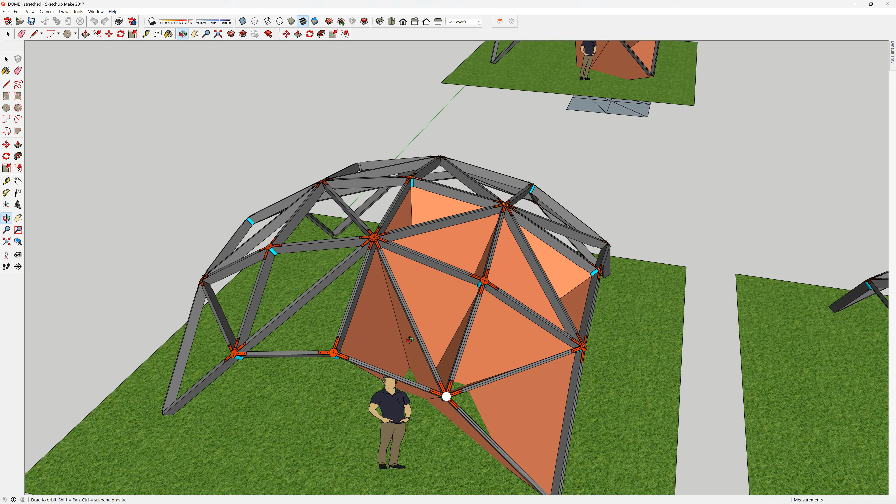This is not part of the Total Redraw series of videos, but it is a derivative or based upon its models that I've actually created. I've got this one, which is the base upon which we will look at the other two. There's actually a third one, which logically I should have included in the total redraw, but I didn't. But I'll include it in this particular video.

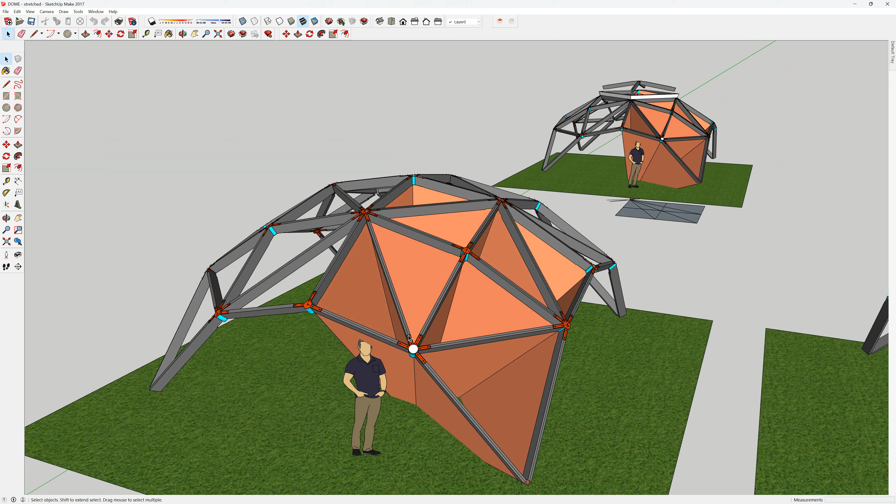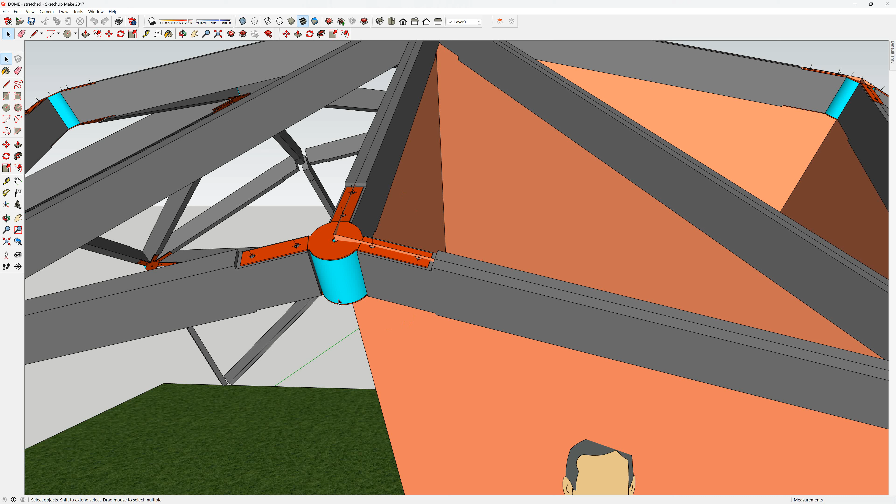So this is where we kind of left off, with some of the struts being altered. Take the hubs, top and bottom hub with a tube, a reinforcement piece in there, but quite a strong combination. They can be independent of each other, the three parts. So they could be like that. They could be welded, bolted together, whichever way you go.

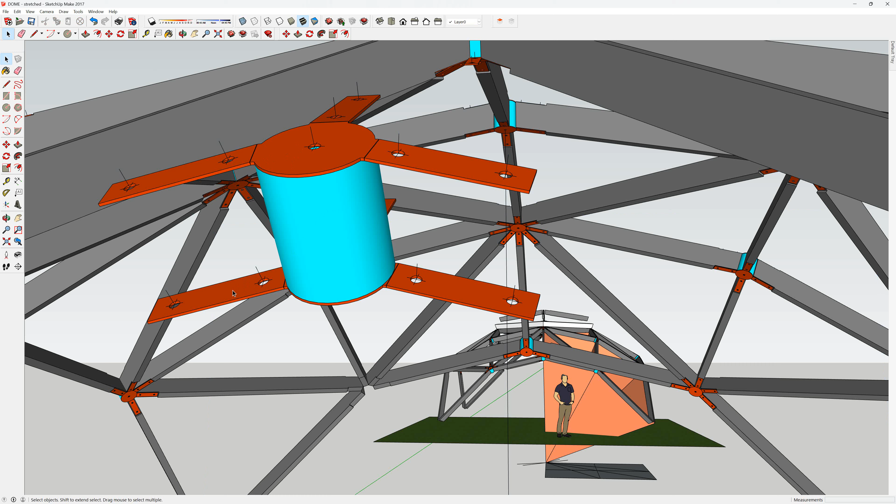If you want to make a heavier version, you can just increase the thickness of the plates, or as I suggested in one video, you could double plate this point here and have a single plate up here. You could have nothing up here, no tube, and just a double plate down the bottom, or you could have a single plate that's made out of thicker steel. So, in short order, you could alter the capability of this hub very easily and make for a very capable structure upon which to make your domes.

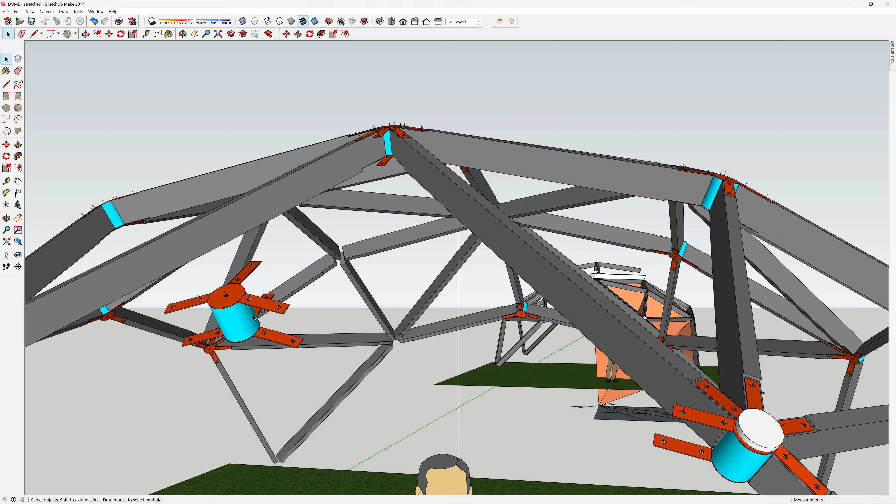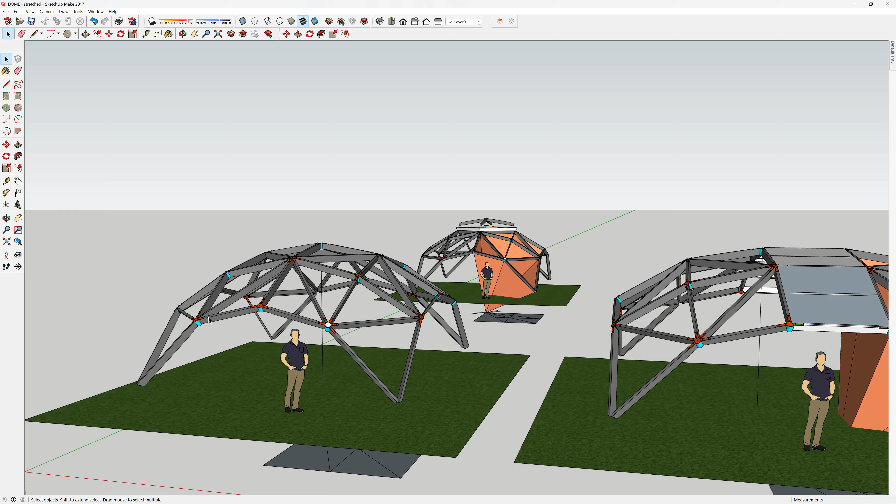Ditto for when I would use the steel tube and the threaded rods. It's very, very viable and very flexible, so that you could alter the dimensions of your items being used to cater for bigger structures. The structure is not small, but it is, after all, only 6 by 6 meters. Now, for a dome of this size, not size, but capability, I think you could go a little bit bigger and not have to change anything, because we've got it already inbuilt. So 7 by 7, 8 by 8, whatever, keep on going. I think this would be quite capable of fulfilling the requirements.

Make these timbers heavier? Yes. Probably have to start thinking about how they hold up on their own. If they're skinned, i.e. have got plywood or anything on the surfaces, then with the ply, it certainly would stabilise the timbers from not sagging, but from moving under their own weight, because of the span. So it may be that you want to go thicker than, as I've got here, 50 millimeters, maybe a little bit deeper, depending. But even this dome is probably a little bit overbuilt.

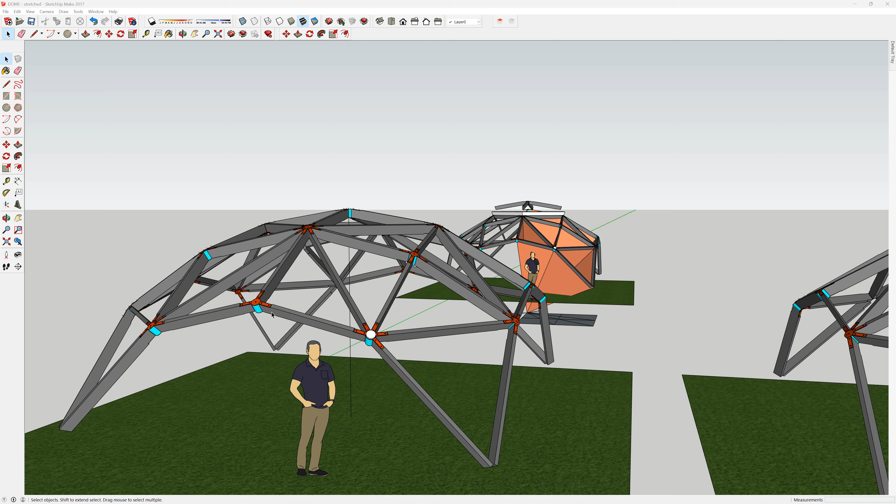You could get away with the 90 by 50 by 100. It's more than doable. So yeah, that is the base. We then can stretch it. As we see a lot of the dome pictures, you can alter it just by separating along the logical divisions that is part of the quad-based or grid-based system of drawing this dome.

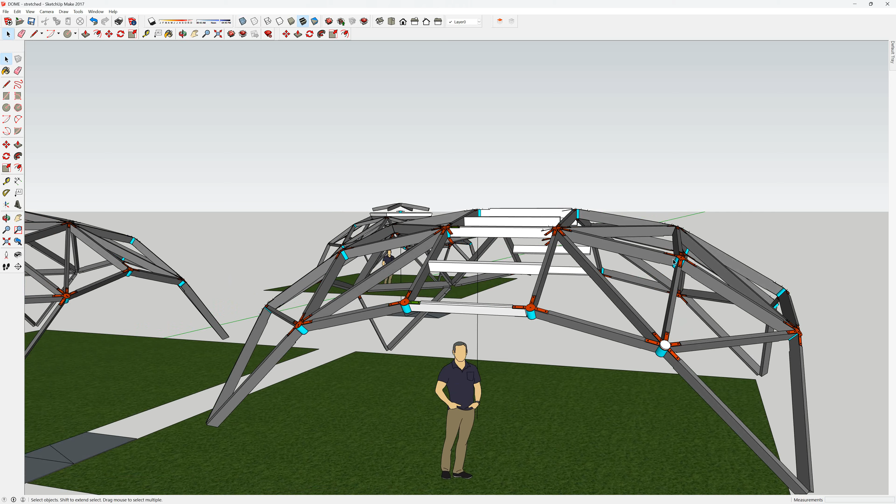Normally, you could divide it through this line as well, but because I've altered it to rationalise the struts for this point here, you can now no longer stretch it at that point smoothly. Still can do it, it just becomes a little bit more involved. But yeah, certainly doable, but just not as good.

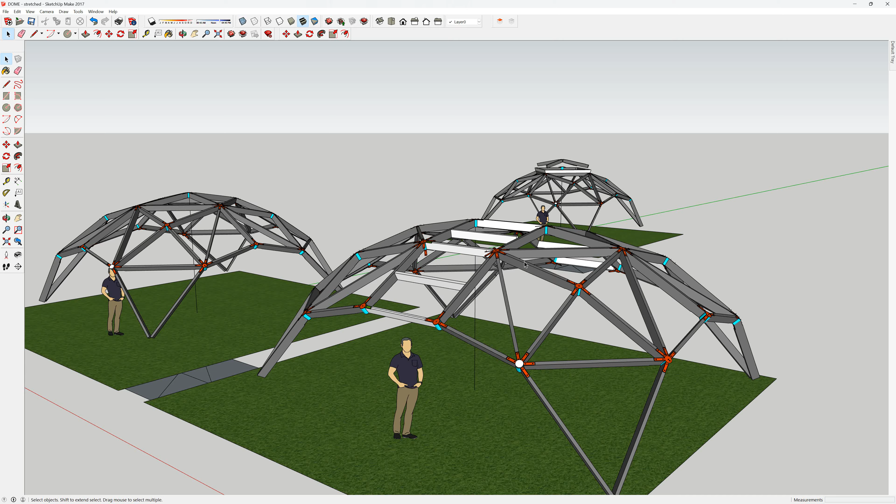And that was one of the things that I did look at, whether I would permit my design to have this alteration, and for the longest time I resisted that. But I thought, the reality is that if people are going to butt these structures up to another structure, that would be even more rare than the times that people would want to build this dome anyway. So it's up to the individual whether they want to do this.

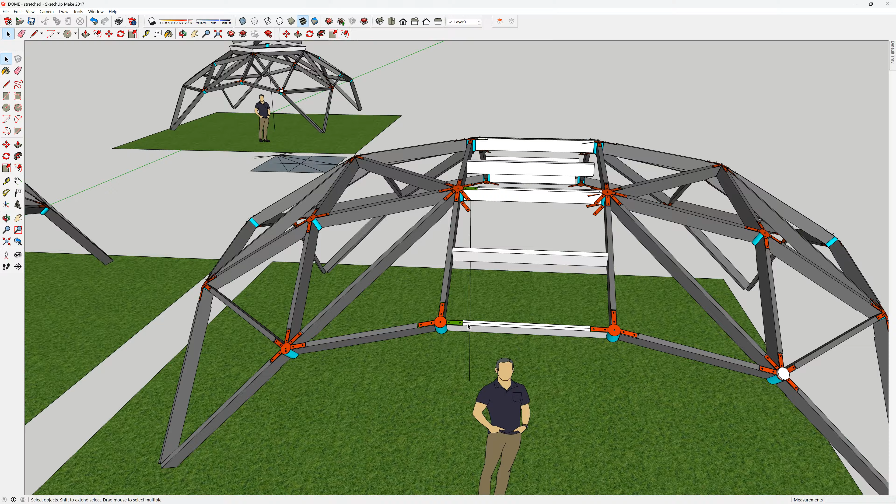I like the idea of having the struts identical, evenly spaced between these struts here, and sideways, of course, but others may not. Nonetheless, I'm not worried about that. So I'm just concentrating here, and I've looked at which hub needs changing. Of course, it's obvious, but it also impacts on how the struts and hubs act together.

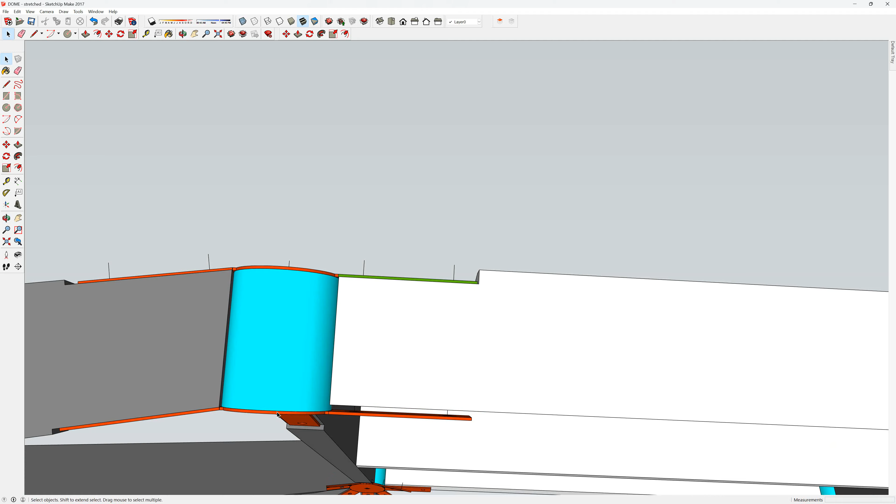This is still in plane for the surfaces, which does make a little bit of an issue here. We'd have to lift the hubs up a little bit if we wanted it to butt up against the strut here, as we would normally think necessary.

But if you haven't been following these videos and you're coming to this one fresh, well, you would have to probably go back and look at the other videos. But you can either lift and lower the struts up to match the hub, and that would be more permissible or quite logical to do if you were putting a membrane over this dome.

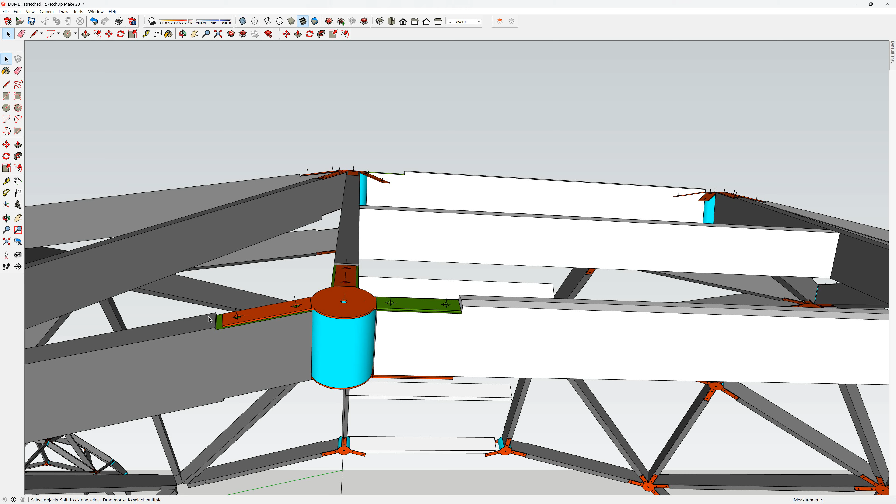If, however, you are considering putting a rigid cladding on it, it may be that you want to keep the surfaces in their geometrically correct position, so that allows you to create the dihedral angles onto which you can then fix your rigid cladding.

Plywood or the exterior grade chipboards - that's the consideration there for that hub.

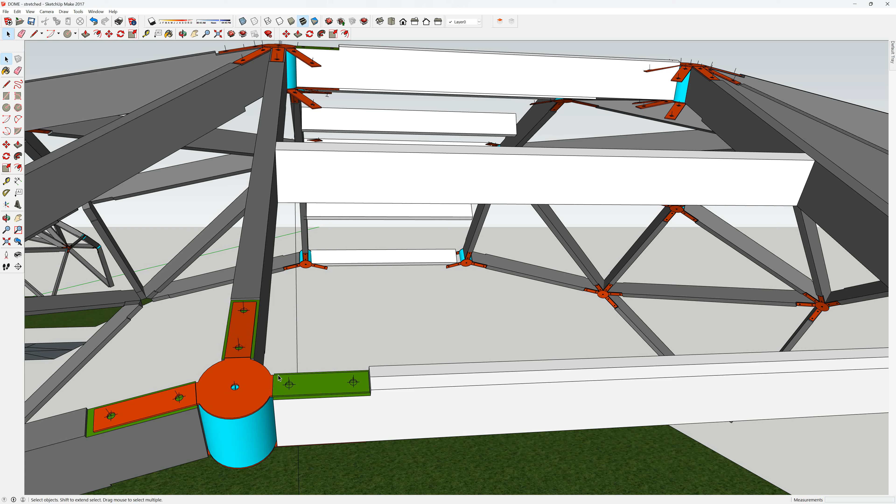All it was, is that you don't bend that tab down like you would in all the other ones, of course. That comes straight out from the plate. It is rotated around a little bit because, after all, it's not the same strut just lifted up as would be in the dome. Again, this one here is identical except for this tab here - it is just rotated round and not bent down. And of course it would have its corresponding one below it, and of course the top one.

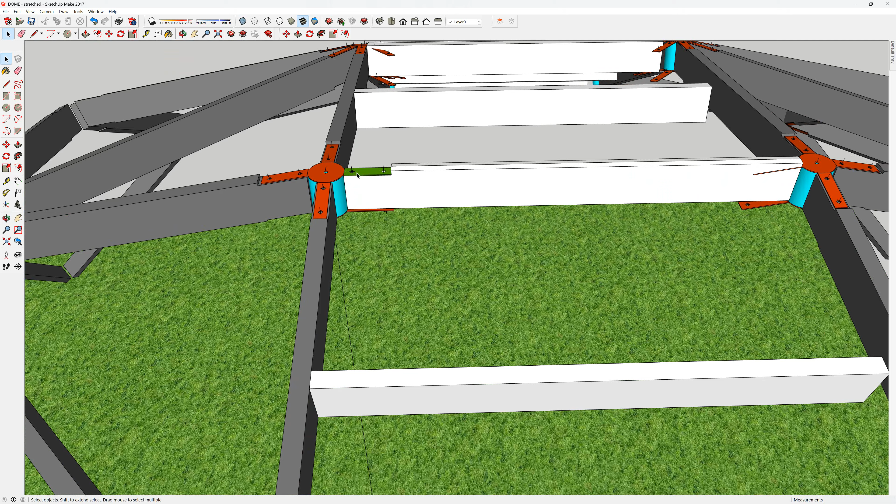I've shown, in this case, I've only done the 3 hubs necessary, and I've shown here that this tab has been altered from the original design. So not hard to do at all - it's no harder to do than the whole dome, like the dome that we had before, just as a dome.

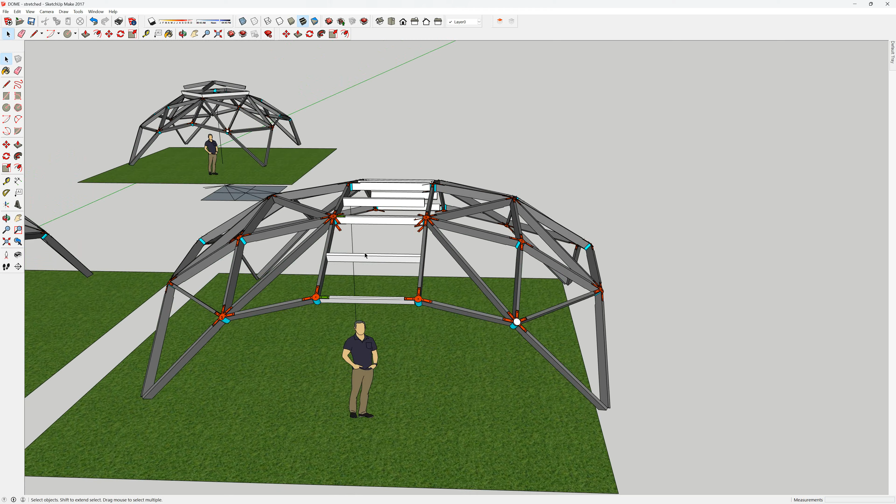But in short order, and this is only about 1,500 or 1.5 metres long, it certainly makes a difference to the function of the dome as to the area it covers. So instead of 6 by 6, it's now 6 by 7.5. Yeah, that's a significant difference, and it certainly looks different.

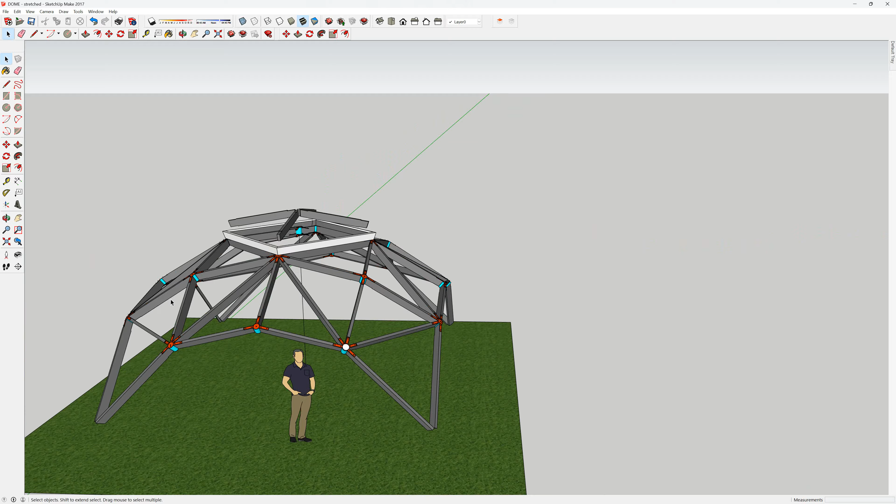The other one in the background is the same base dome as we start off with, but we lift it up. I haven't really done much development on this, but we can lift the top part, and I suggest we'd keep that now no longer transparent, with glass or anything. You could - there's no reason why you can't - but perhaps this becomes more of an opaque structure, and depending on how high we lift things up, we could well put a translucent perimeter underneath, the bit that gets lifted up. Haven't developed this, it was just an idea. I've seen it in another dome, and I thought I'll see what's involved for us to do it here.

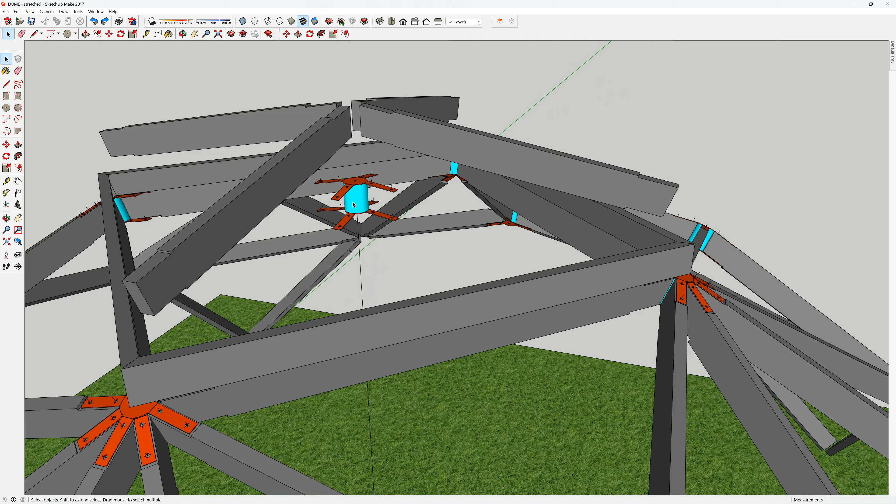Not much happens here. We can delete a tab at this point - no difficulty doing that. And then we can lift the centerpieces up, yes up, and of course that would go with it. That would stay identical, and we just extend what we're going to call rafters, I suppose, but these struts we just extend out so that it gives a wee bit of an overhang.

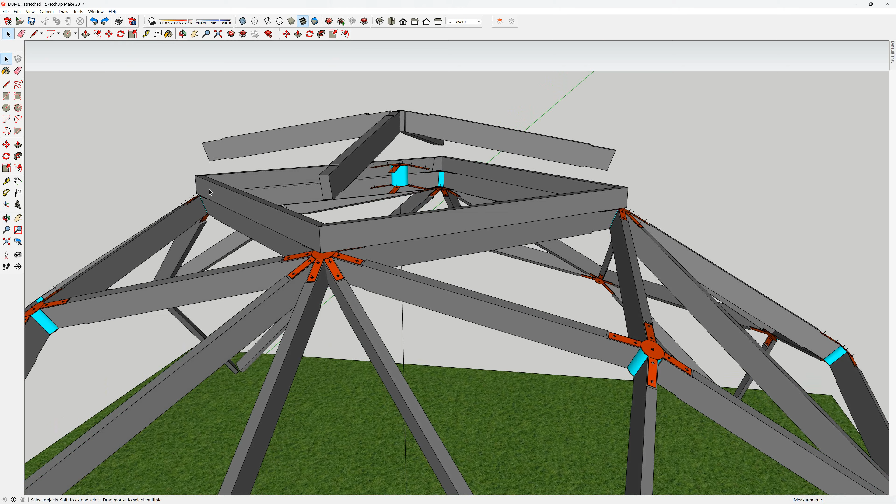Of course, we'd waterproof along the surfaces up the now vertical timbers, up and over, and then we can put our glazing around the perimeter if we deem that necessary. So that's pretty straightforward.

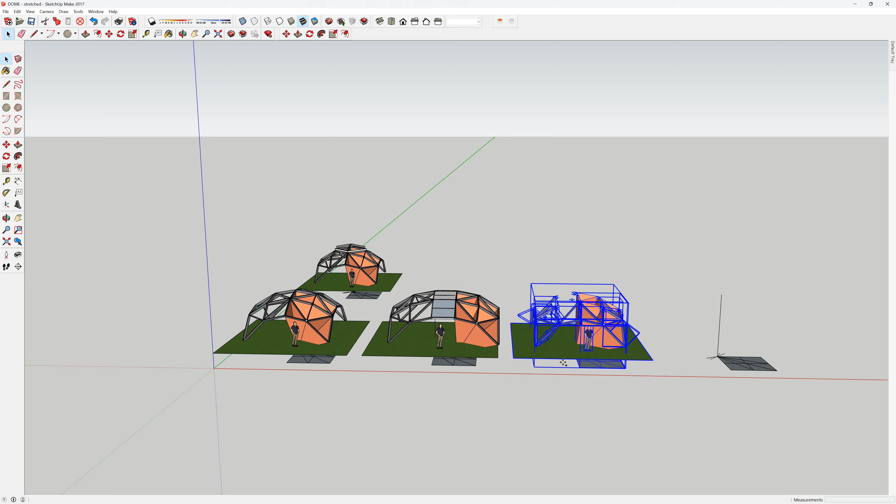Right, what's that doing? Let's see. Now what we can do is I'm going to move this one across 20 metres. I obviously didn't capture everything, so let's not do that. Move across 20 metres.

One of the things I've shown here is the dome to function nicely in the entrance area, is that I've always set a criteria for this: the point here that I'm circling now needs to be about 1.8 metres off the ground. 1.8 metres, I'm not going to say that is the average height for an adult male, but it's probably the average height of an average male, so you could walk up to and near this area here without smacking your head or fear of smacking your head.

Now, I know a few people that are a bit taller than that, so therefore they would want to walk through here, or we just have to lift everything up. What I've shown is that the dome - nothing changes, the whole dome gets lifted up, and it rests on some pedestals or piers bolted down to that. We keep this dead standard, and, well, it becomes a very normal structure. We don't have to alter anything.

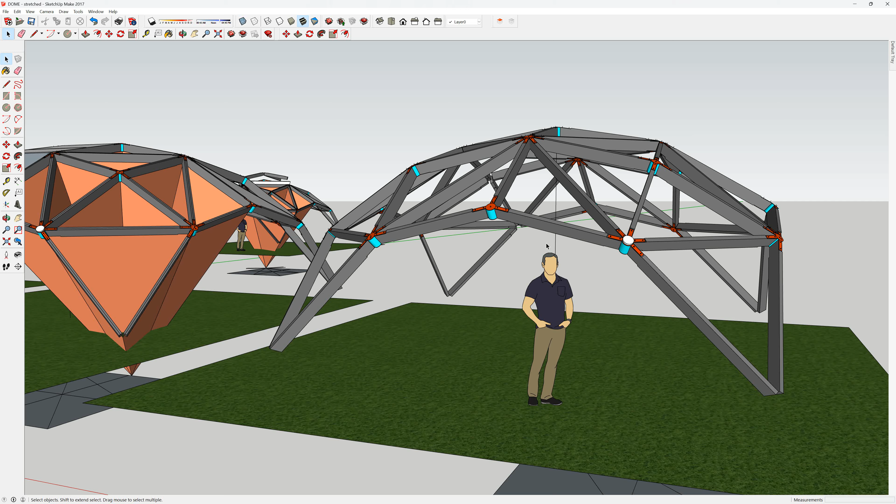However, one thing that may be beneficial - and I'm not going to probably do too much, it's just an indicator, I'll probably make a model up at some stage - is keep it, how would you say, I'm going to hide those... keep it looking like a dome by simply making the struts come down to this point here, rather than being lifted up, keep the struts at ground level.

There's a couple of advantages in that. Pretty straightforward, it's probably simpler rather than having a pedestal or pier sticking up out of the ground. Maybe easier. There is a little bit of alteration required on the hub, and that's why I'm not really worried about doing the modelling just now, because it's a little bit involved to change that. Not hard, it's just don't want to do it right now.

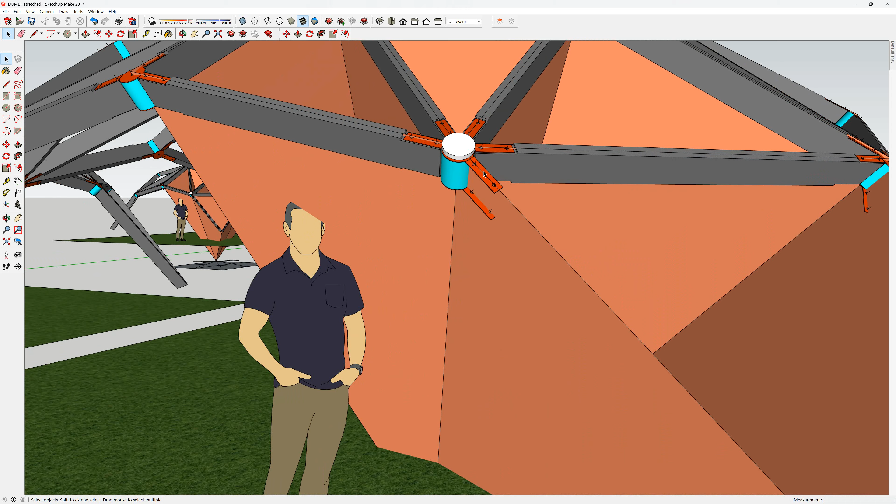But that would mean that these two tabs, or it's just one, but the tab on the plate would have to rotate slightly and be bent down a little bit more.

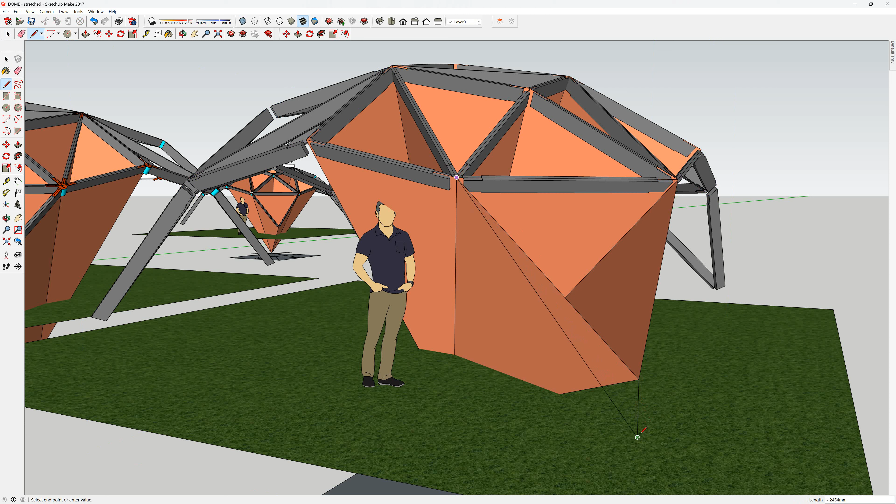Let's just hide that and put a line from there up to there, across, and that creates the surface we could use as the leg, generating some of the information for creating all the changes to the leg.

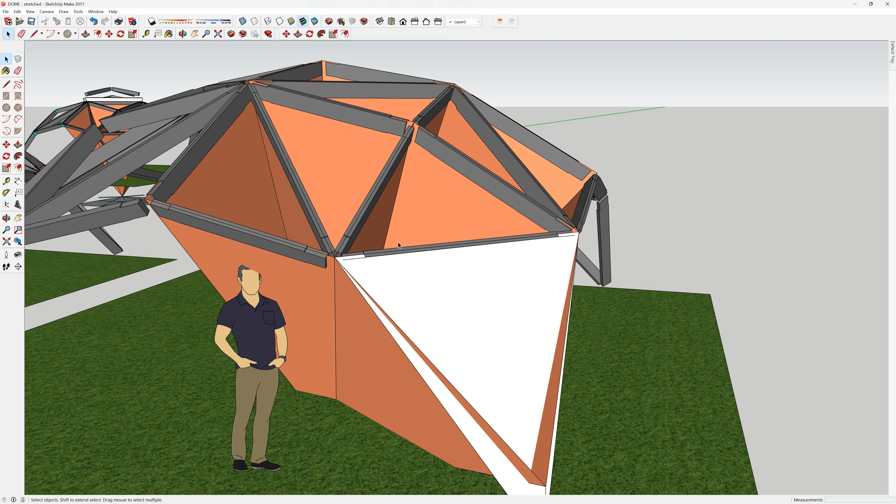It changes the angle between this triangle and this new leg triangle, which gives it a bit more dihedral angle, which is a good thing. I think it actually makes the dome a little bit stronger - not probably a good way of wording it, but I'm not that worried about it either.

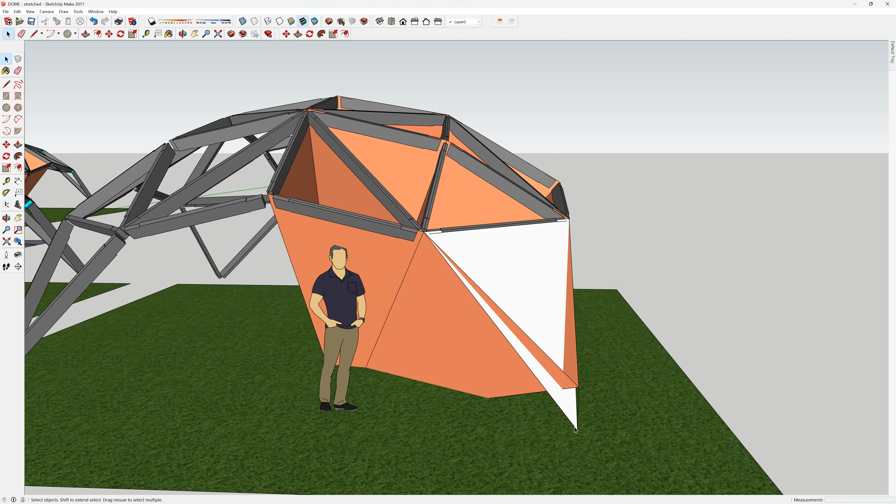The strut length, as per the design of the honeycomb we refer to, is 2121. At this point here, it's just over 300 mils longer. So nothing untoward there. But that's certainly something that could be considered, and you'd probably wind up looking at it and going, I think that's actually better.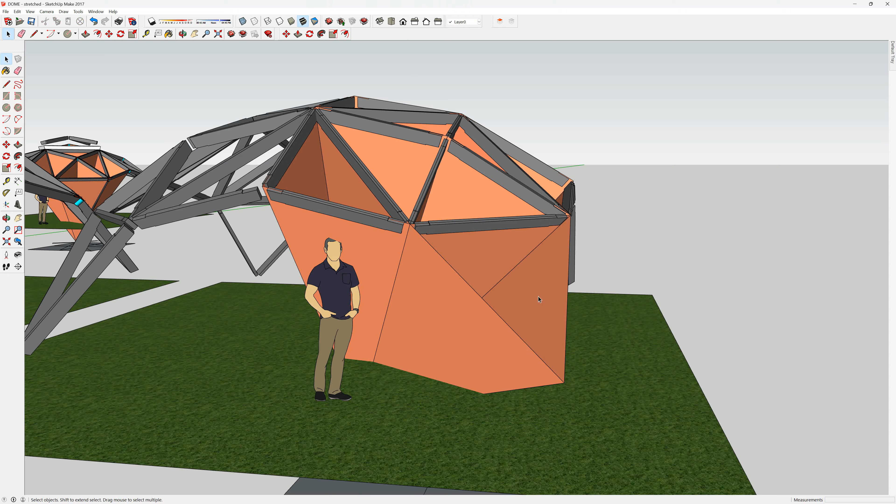Well, you may well do. So there's that option - just like, I've already grouped it, so I'll delete that. But that certainly is something that I should have included in the redraw.

It is a good design option, because after all, if we're going to change the dome from a dome to this, where we change the actual base from the grid - getting a bit woolly now - if we've adjusted this, why can't we adjust the triangle that comes down and be more normal-like? So that certainly is a consideration.

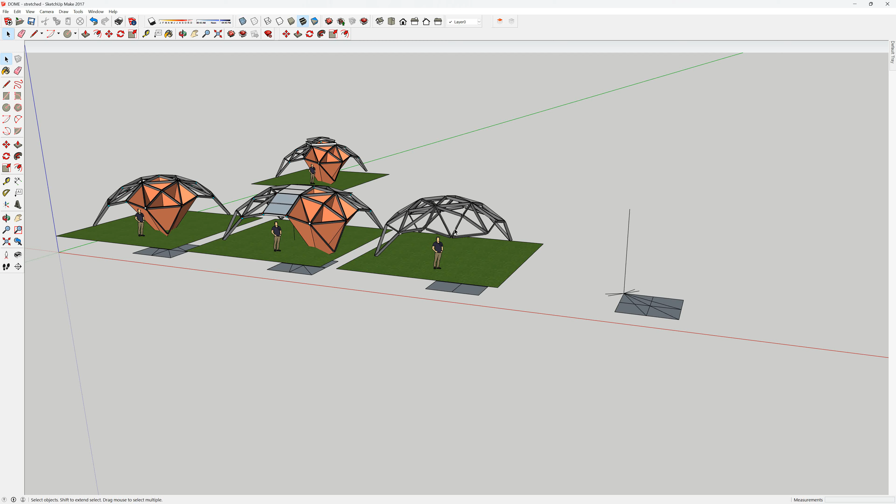I might do a little bit of work on that, have it as an extra model, mainly because I'm interested in it, and I know, as I've said before, this particular style of dome is a niche within a niche within a niche.

And I think it's more for the dome builder that's not biased - I'm not saying that in a derogatory way - but not biased towards the, air quote, normal style of dome that we're used to. But when you start looking at some of these other domes that are made, you think, ooh, they are quite complicated.

The zomes and the alternate version - it's because you've got the conventional and then you've got the alternate dome types. All very doable. Do you want to do that? Well, you've got to get your head around the change. Once you do, you're happy.

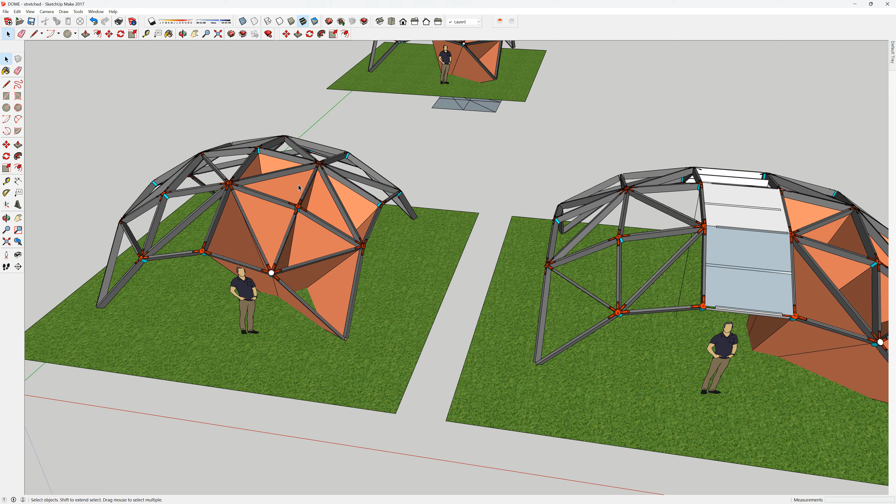Ditto with this - why on earth would I want to go rectangular when I could stay with the normal hexagon? Well, that's also true. This shape is probably not as viable for a stretch-over membrane because the two triangles here form a concave orientation to each other.

So that's probably not a good thing there, unless it's tied down - I can just see this always wanting to lift up off of the surfaces. It is, however, a good way of building, well, an alternative way of building. If you're putting hard surfaces on here, it becomes irrelevant. Waterproofing etc. becomes irrelevant because you're going to be doing it to the other surfaces anyway.

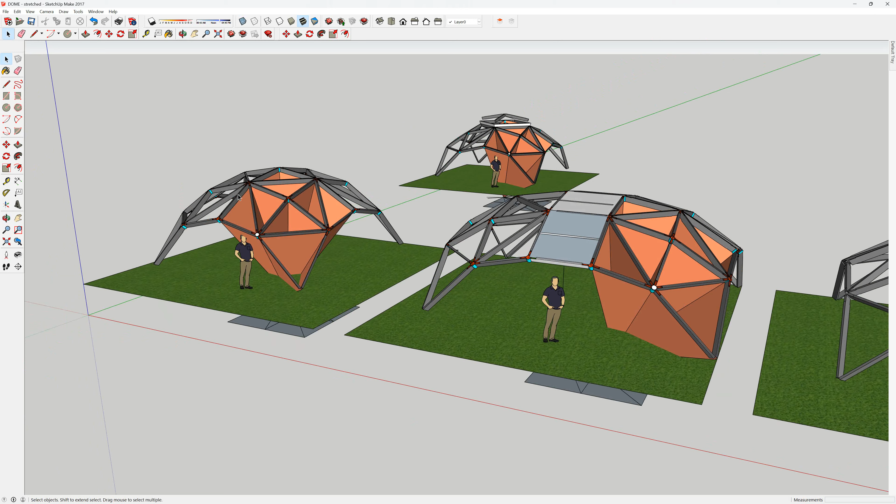So the fact that it's concave is irrelevant. Yeah, it actually forms a little bit of a gutter and directs the water somewhat away from the opening.

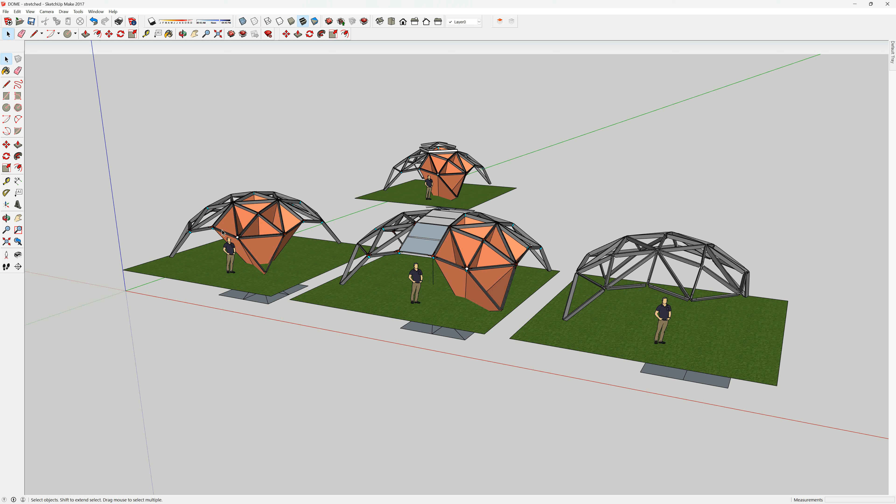The other alternative, which I've looked at ages ago and haven't for this - not certain why I haven't, probably because I didn't think it was really going to be beneficial - is can you carry on the shapes to infill the dome that isn't restricted by the fact that I've got a flat plane for the opening? And the answer is yes, you can do that, but they become quite odd shaped.

But I will look at that just for the sake of thoroughness, for no other reason probably, and I will create the video if I think it's beneficial or at least of some interest to show that and reflect that idea. So then it becomes more conventionally dome shaped.

Whether the rectangle version is going to be helpful or a hindrance, I don't know. So that's why I'll do it, because it may well be that that's what you or I want, or that niche within a niche within a niche.

What I'm saying there is most people would still probably prefer the pentagon and hexagon type of dome, probably prefer the full complete dome that comes right down to the ground completely. Probably even if they went with quad, they'd probably still stay with the hexagon if they go.

So you can see that every time I make a change, it becomes probably quite - the demographic becomes smaller. I personally think this is quite a good design. Others probably think it's not. So, can't do much about that.